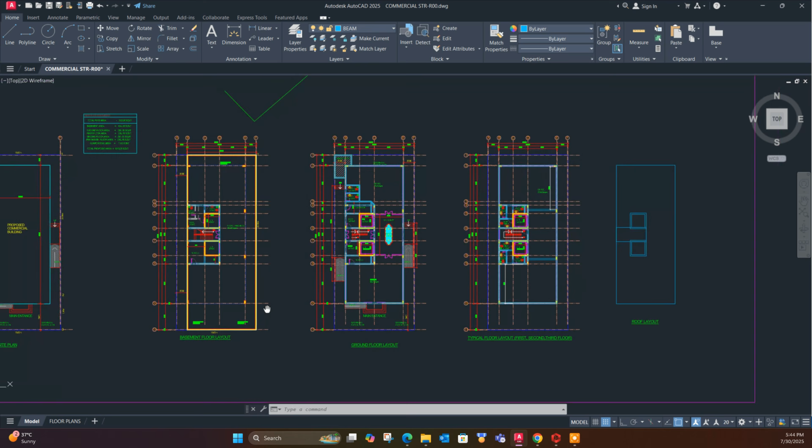Bismillahirrahmanirrahim. Dear viewers, in this tutorial, we will model a 5-storied commercial building having one basement. This is the plan of the commercial building and this is the elevation. From here, we will get floor heights.

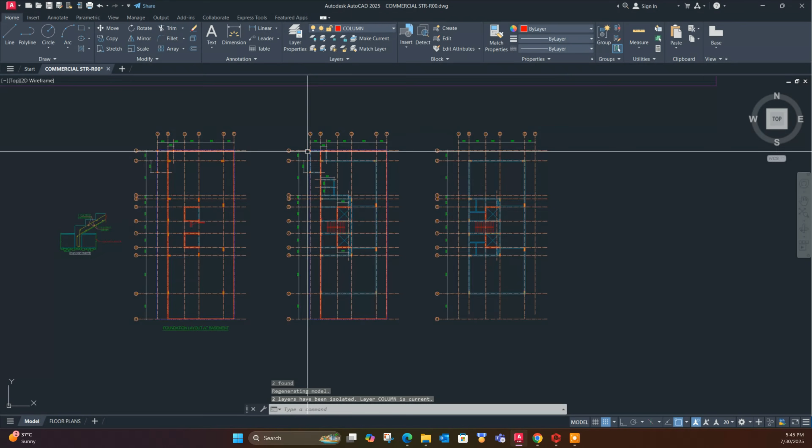First, we will isolate column and grid layers so that we can prepare the DXF file to import into ProtaStructure. Now separate the column and grid layers. From here copy these layers to a new CAD window, then paste here. From here we will make it a DXF file and we will save the DXF file so that we can import into ProtaStructure.

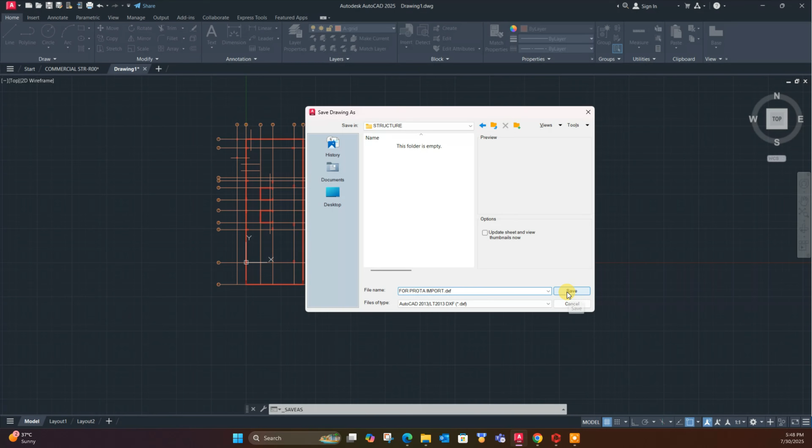Now close the drawing tab, open ProtaStructure program. From here create new project, type the project name, then select the template with relevant code which we want to use for this project. Click OK. Now go to DXF import option. From here load DXF file. Now select the layers. Using this, grids and columns will be automatically generated in ProtaStructure. Other things we will keep same as it is, then click OK.

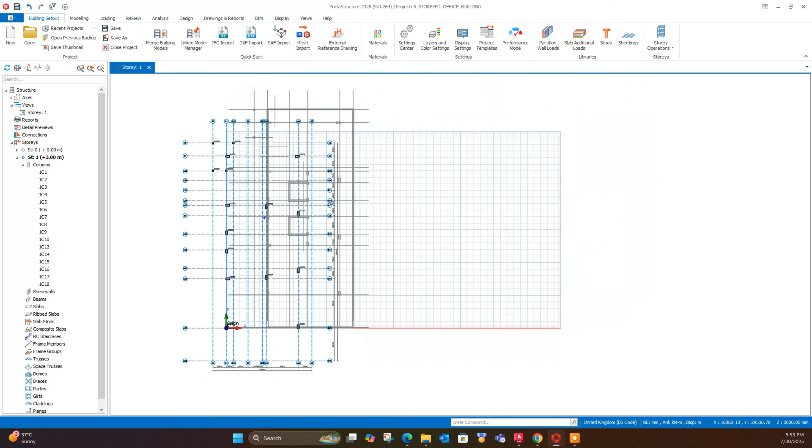Here the retaining wall section was drawn with column layer, so full rectangular section generated from retaining wall boundary. So we will delete it. We can use external reference drawing to model other elements in ProtaStructure. Here I am using same DXF file as external reference drawing. We can see the drawing is not located at exact origin of the main model. We can move the reference drawing easily like this. Now we can model lift core wall following the reference drawing.

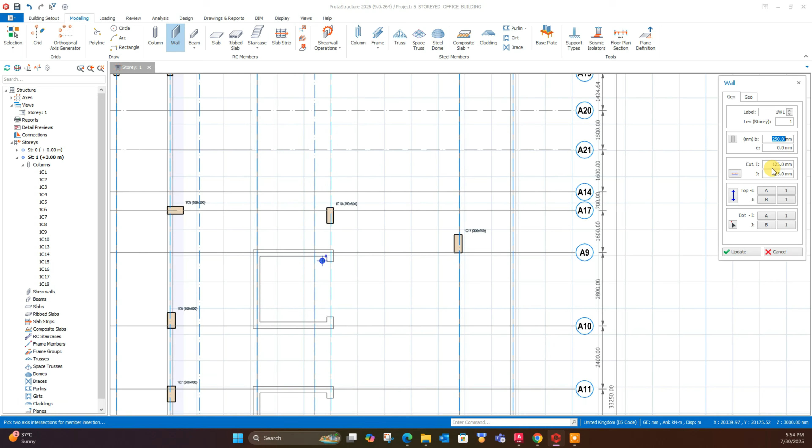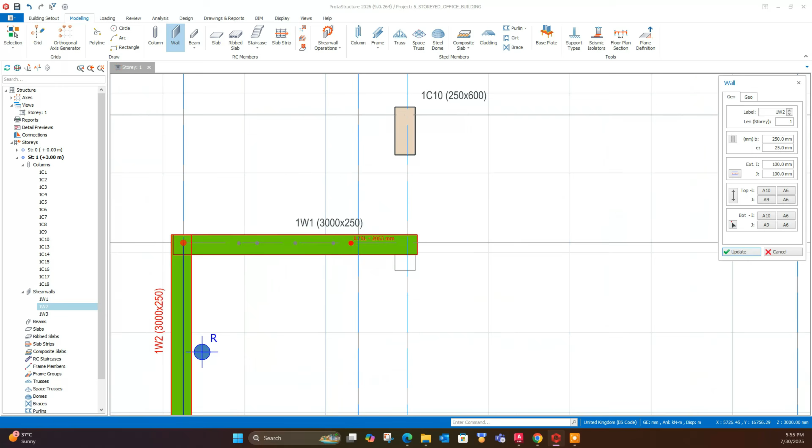Here we will provide the thickness of wall and offset over the center line or grid line. We have not provided any eccentricity or offset. We are modeling the wall keeping grid in center line. Now we will adjust the wall offset using up, down, left, right arrow of the keyboard to make the wall aligned with the reference drawing. And we can adjust the extension of wall from the connecting nodes like this.

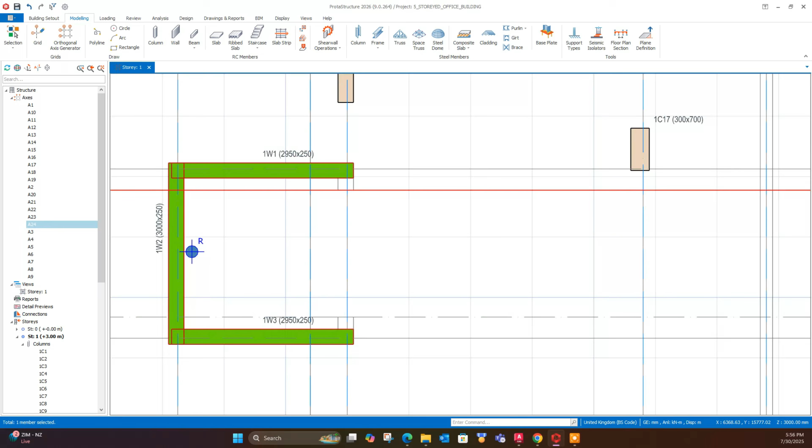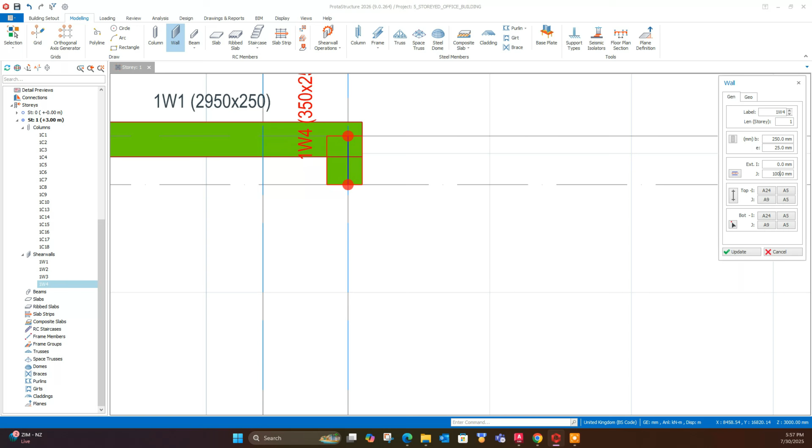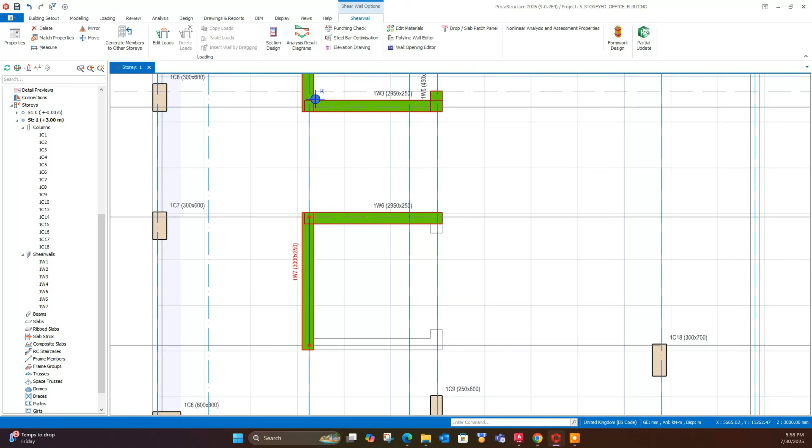Now create more grids to model the other portion as per reference drawing. Select the wall option, then customize start and end offset of wall. Not like this, so modify the offset like this. It will match with the reference plan. Similarly, down part like this. Then model other lift core in the same way. Here we can double click on existing walls to model new wall similar to that wall with similar offsets like this. Now model a small portion of walls same like before.

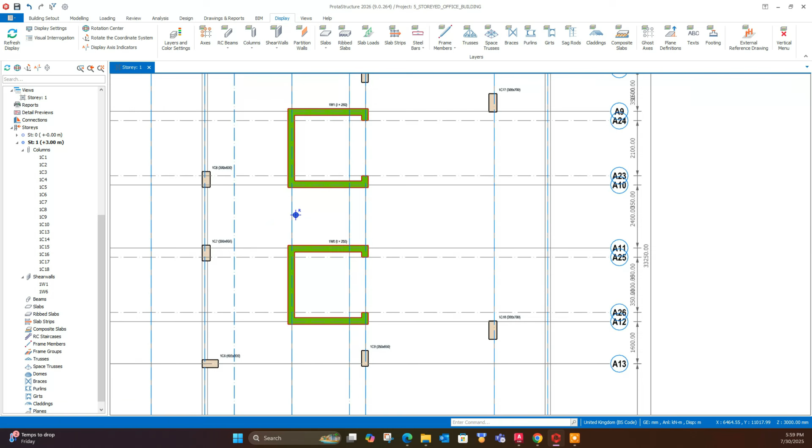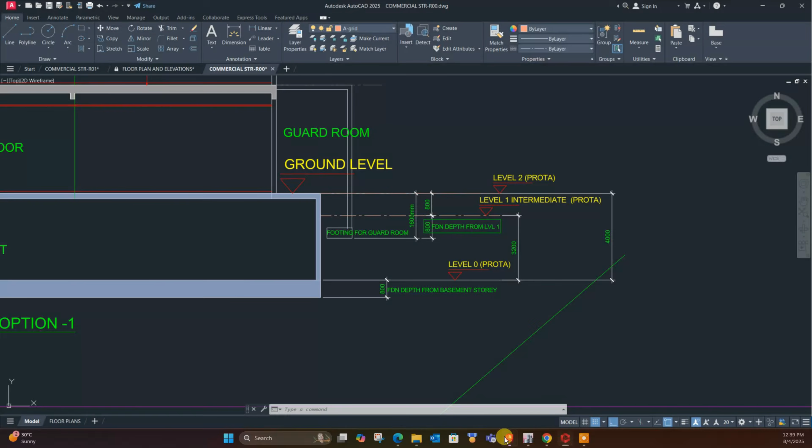Now we can merge the walls to create a single element in the structure. We can see our model in 3D view. Save the model. From View tab, we can create multiple windows side by side. We will create level for guard room as its foundation level is above the basement level. This is the guard room in plan. This is in structural layout.

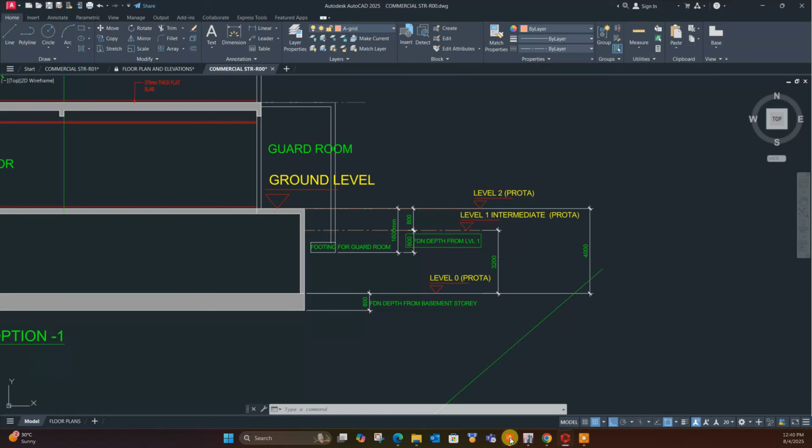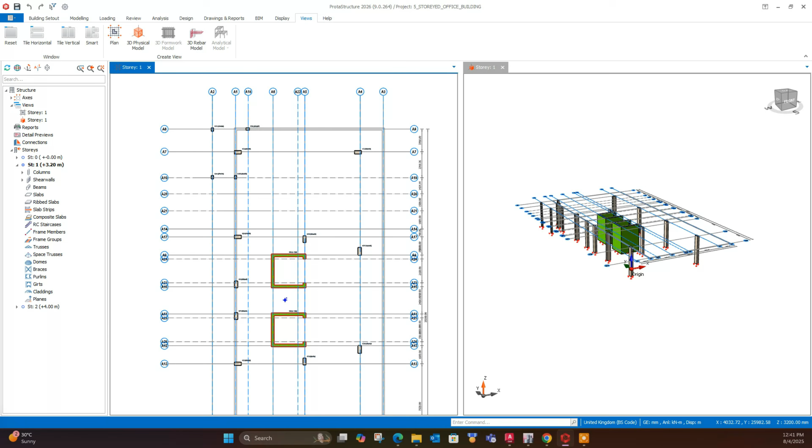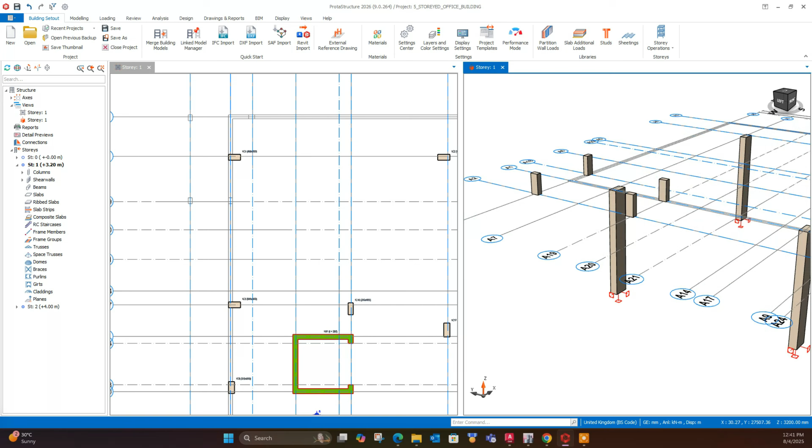Go to edit story. Here we will edit the story height. First one 3.2 meter. At that level, plinth beam for guard room will be there. Then we will insert another story 800 millimeter above this level. So these two combining the basement floor level 4 meter. We can select 3.2 meter level as intermediate level. Then select 4 columns of guard room and replicate or copy it to next level. Now delete guard room columns from basement level as per the elevation.

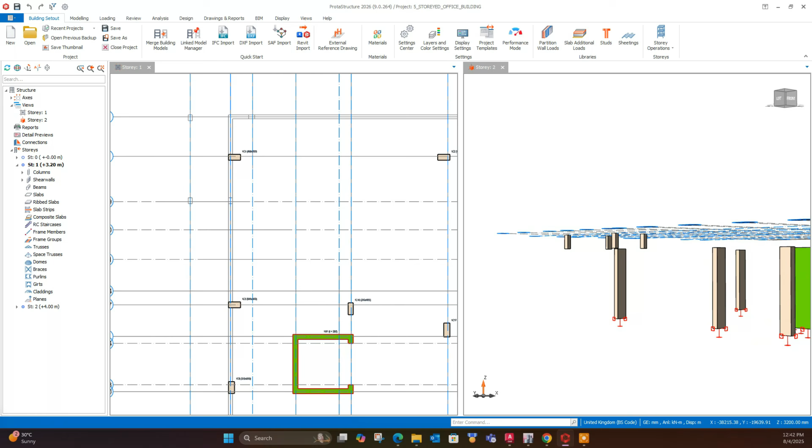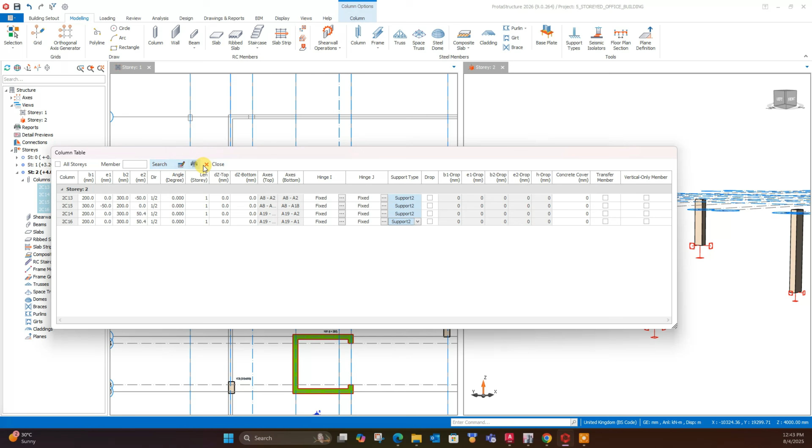Foundation depth for basement level 80 centimeter and the guard room foundation level also 80 centimeter down from the plinth beam. Now we will assign support for this guard room columns. We will define new support and then assign support to these 4 columns like this. Now close. In this way we can provide support in different level in ProtaStructure.

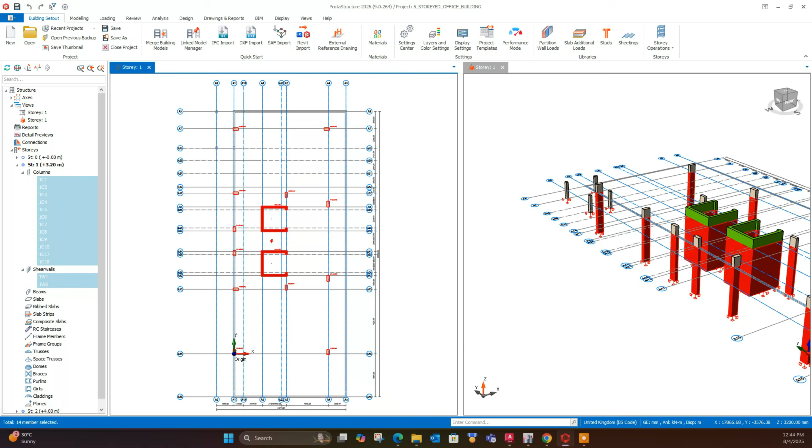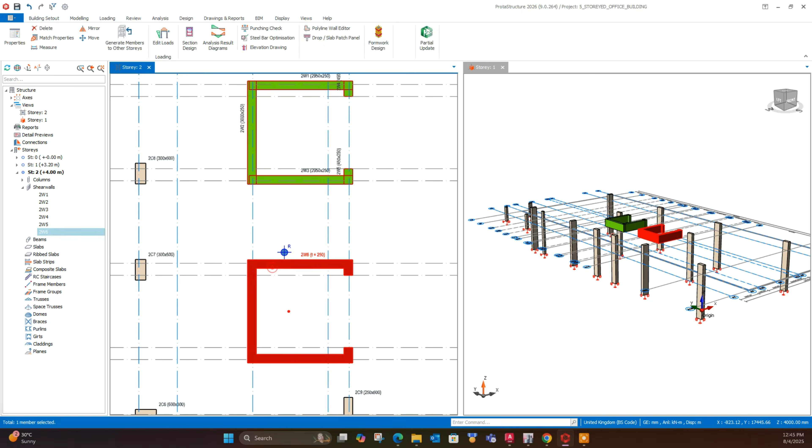Now select other columns to replicate to next story. Then we will delete the members from lower story. Then first we will select columns only, deselect the walls, then go to list. From here we will change the length story from 1 to 2. Similarly, select the walls and change the length from 1 to 2 so that these members can continue from basement roof to bottom of the basement.

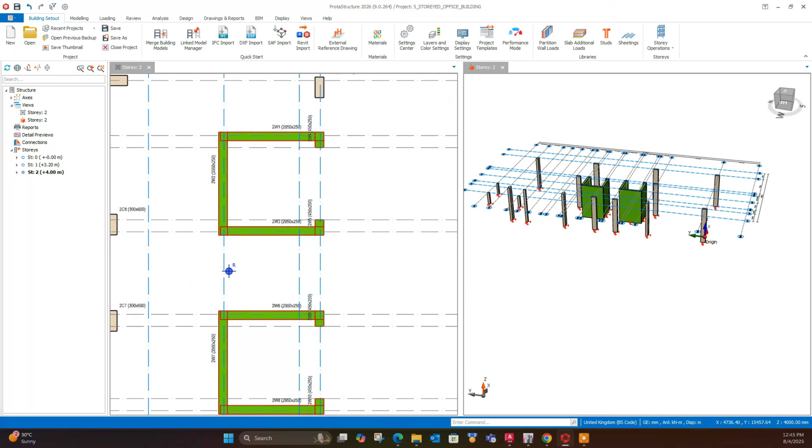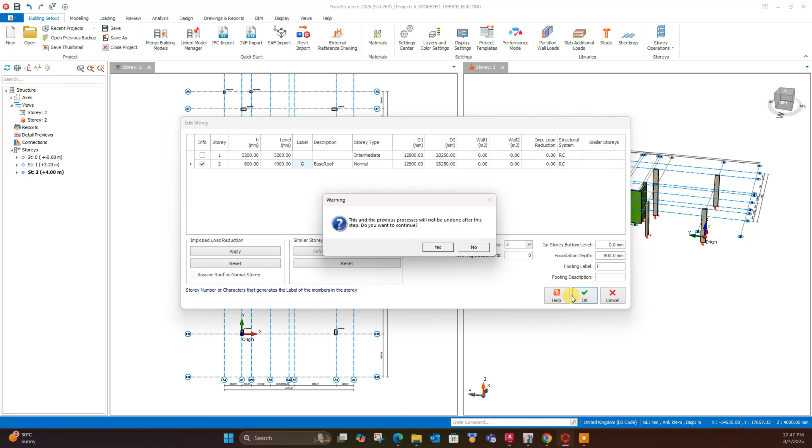From edit story, we can provide the description for basement roof level. We can provide level marking so that in detailing the beam, column and other members will be identified by those level marks. Click on OK. Save the model. Now we can model basement wall following the reference drawing. Provide the wall thickness and other parameters.

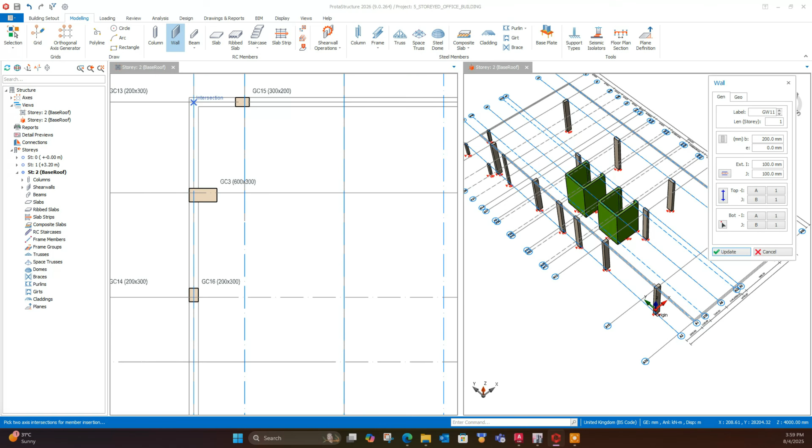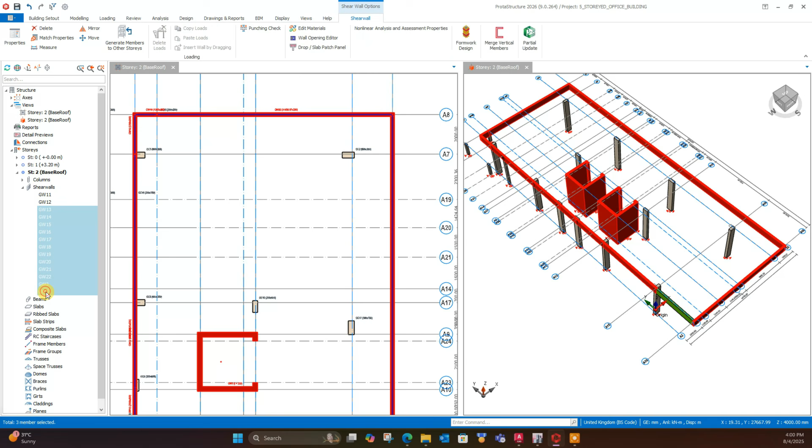Similarly, model this basement wall all around the plot line and then select the retaining walls to change their length from single story to double story like this. Now we will model beams at basement roof level.

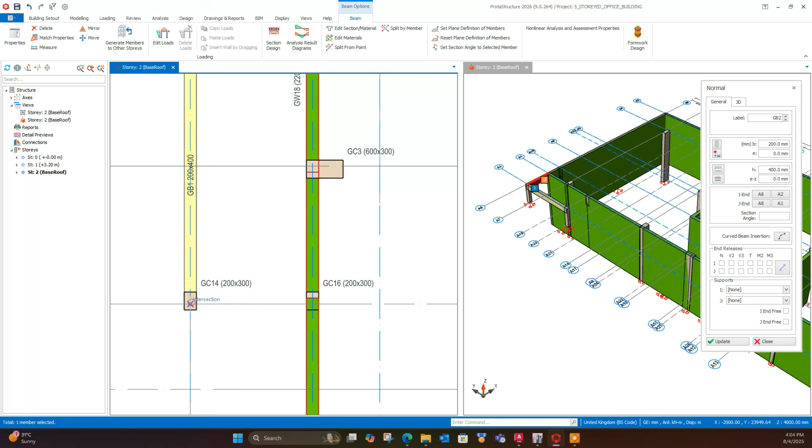I have increased the speed of the video because modeling of beam is easy and same like before we have seen in previous tutorials. If you are new to ProtaStructure, you can check my previous tutorials on different buildings. You will see there how to model beams, and from here also you can understand how we are providing parameters and modeling the beams.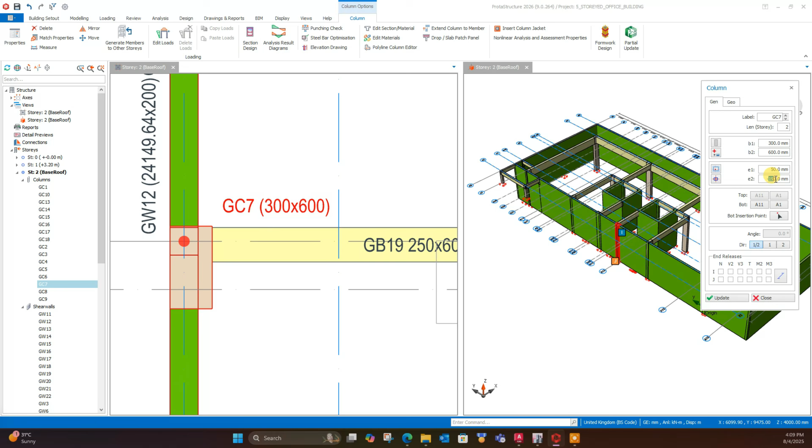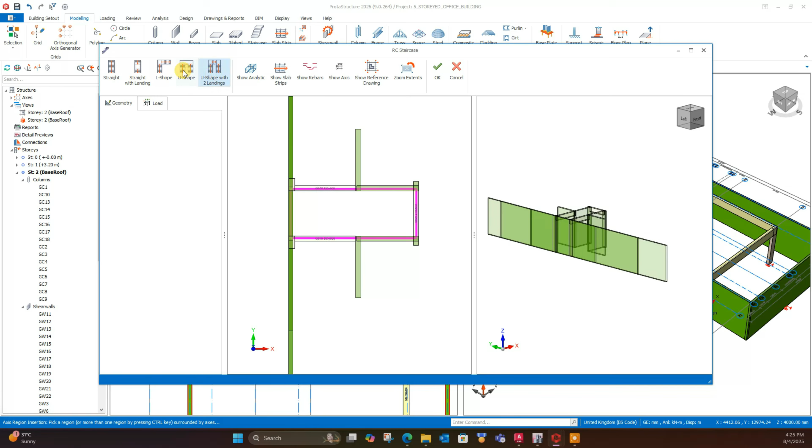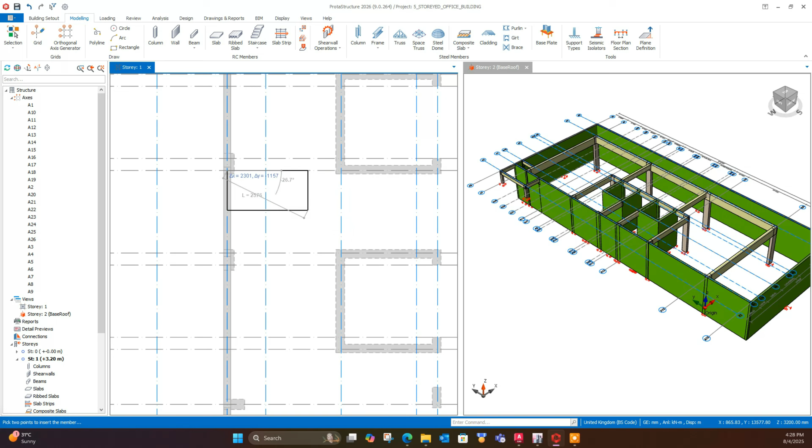Now we will model stair. Program will ask to define load cases before modeling stair or slab. We will define preliminary load cases, dead load and live load. Then we will start modeling of stair or first slab in model. Here in this level, stair is getting only 80 centimeter height. So we have to go to basement level to model the stair up to 3.2 meter height. Then we will change the floor height at stair model from 3.2 meter to 4 meter so that it can cover basement level to basement roof level.

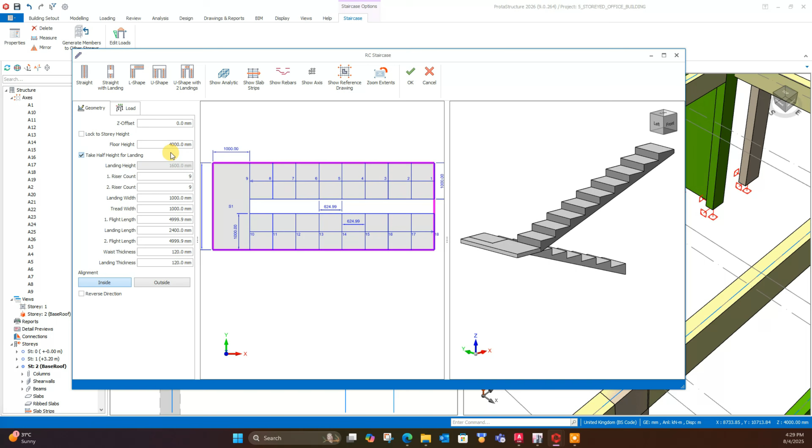Now here we can see the stair top level at 3.2 meter level. So now double click on this and then provide floor height 4 meter to adjust the stair top level at basement roof. Now it is okay. Here we can edit step number, waist slab thickness, landing width and other things as per architectural drawing. Then we can provide the loading values from the load tab. Click on OK.

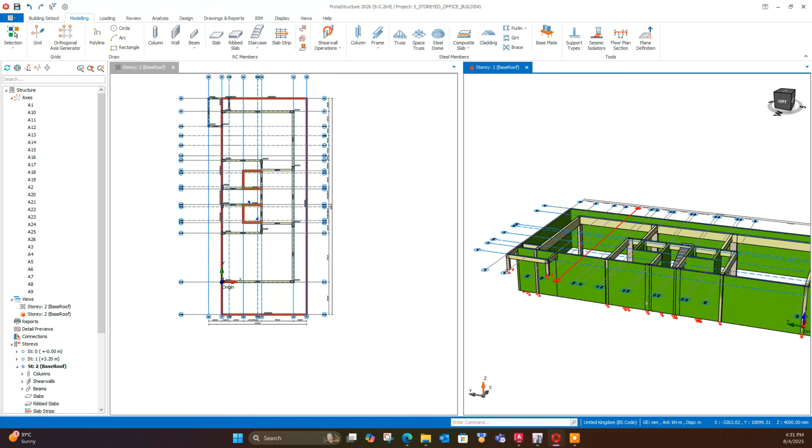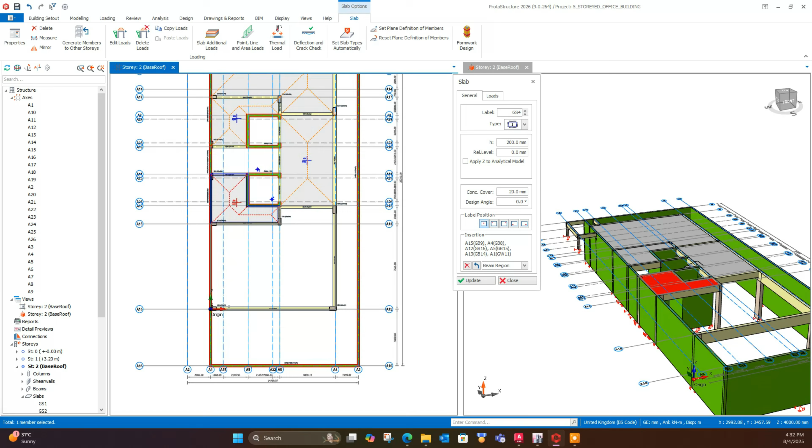Now go to basement roof level. Here we will model slab, basement roof slab, provide slab thickness, then loading values. From the list of occupancy category, we can give the input for live load. Use beam region to model the slab. In this way, we will model all the slab for basement roof level.

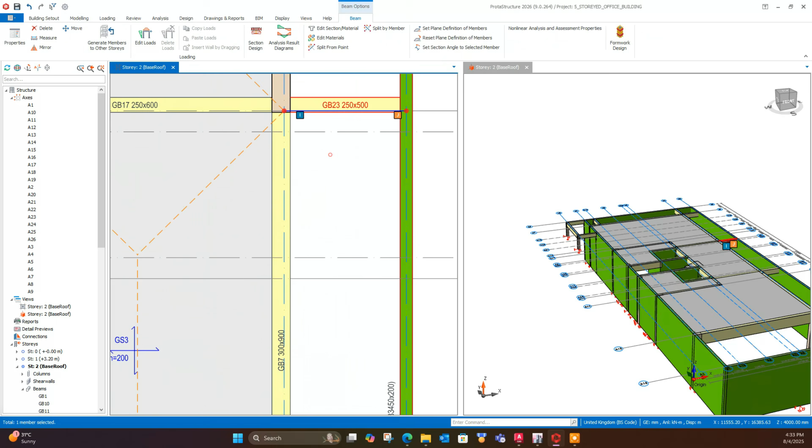Modeling a few extra beams to cover the basement roof level outside the main building area. It will reduce the slab span length.

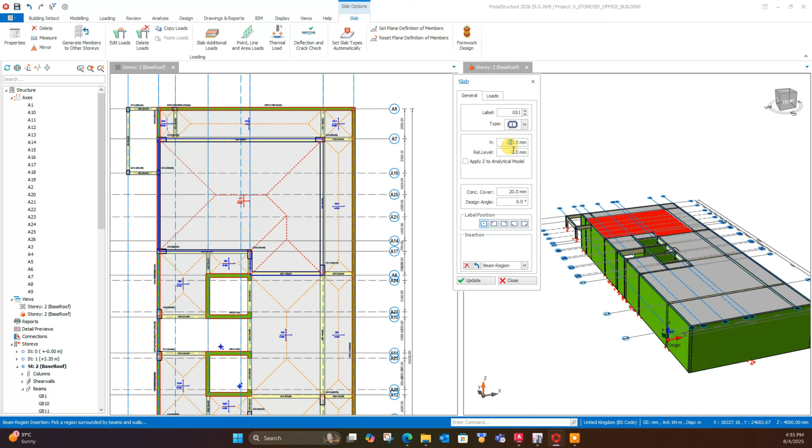Here, this slab area we can separate using an additional beam. Now model the separated slab in those areas. We can increase the slab thickness for large slab areas. For other small slab areas, we can decrease the slab thickness.

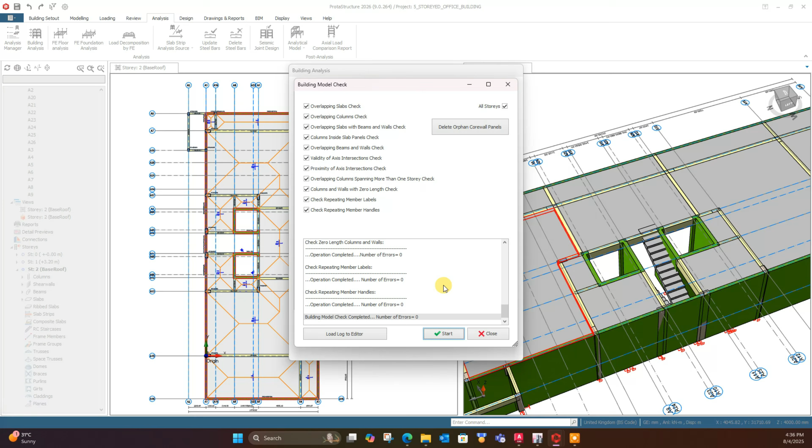Now save the model. Then run building model check to confirm that there is no warning in the model. We can view our model in single line view or analytical view like this.

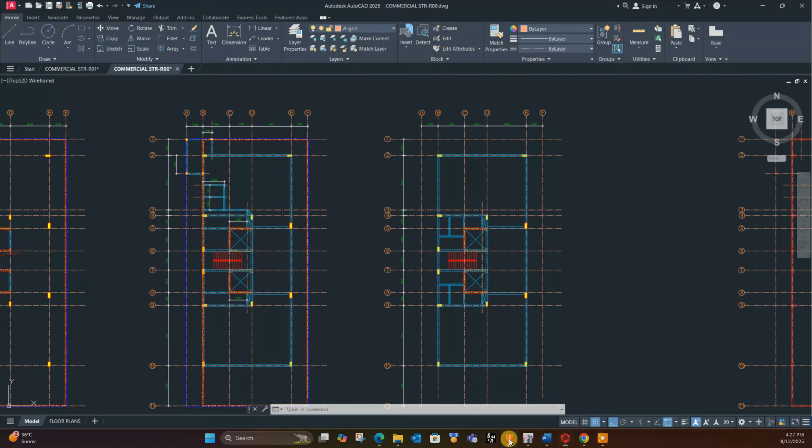Now we will add stories using the option in insert story. Here we have already inserted two stories or two levels. Now how many levels need to be added? We can see here 5. So 2 plus 5, total 7. Here we have to provide the total number of stories to get an extra 5 levels.

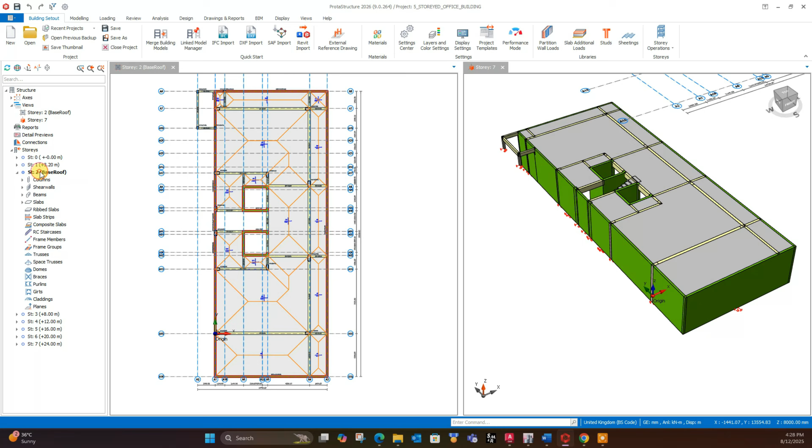Height providing 4 meters for typical floors. Ground floor height is 5 meters. So we will edit the ground floor height. Here type 5 meters, 5000, and other floors 4 meters typical floor, and the top floor, that means stair head, that is 3 meters. We can provide the description for different levels: ground floor roof, first floor roof, second floor roof, like this.

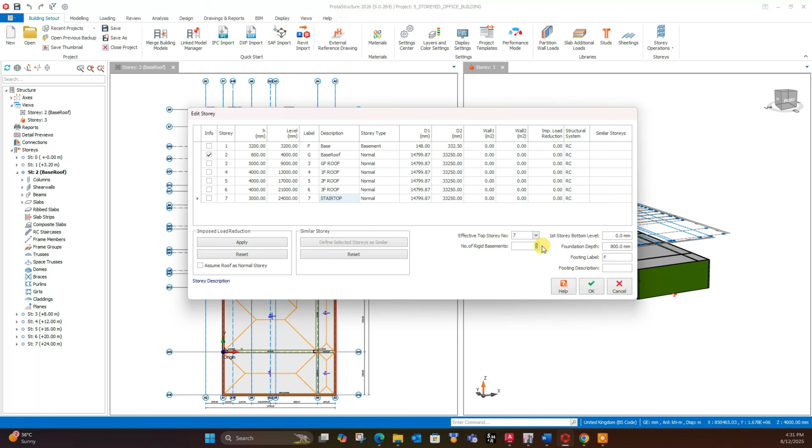Now we can provide the number of rigid basements. The basement floor we have divided into two parts. So for the basement floor we will provide number of rigid basements 2. Now check the plan is in story 2. Then go to generate story. From story 2 to next story, click on OK.

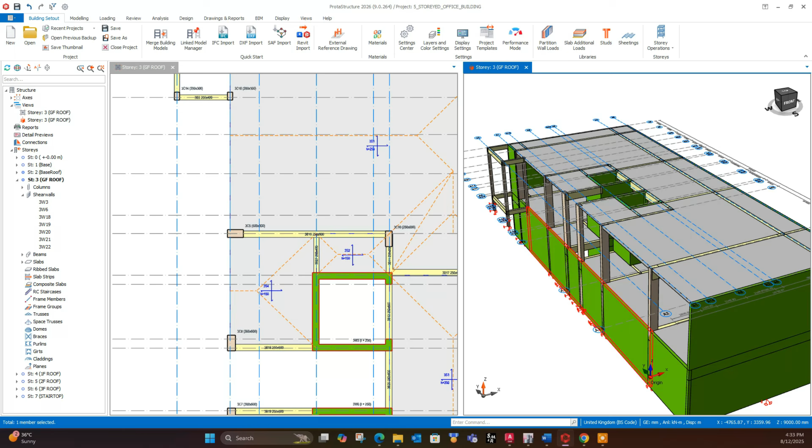Now delete the retaining walls from this new story. Here we can see the column and wall members having double height because we have assigned member length 2 for continuing 2 floors. Now for these newly generated members we have to change the length from 2 to 1.

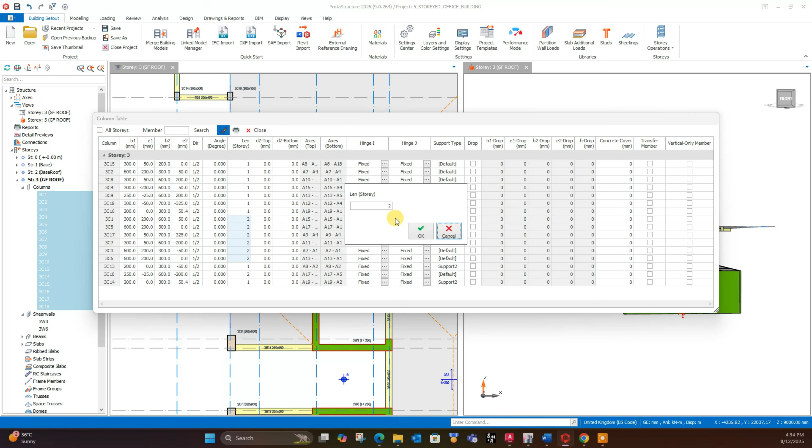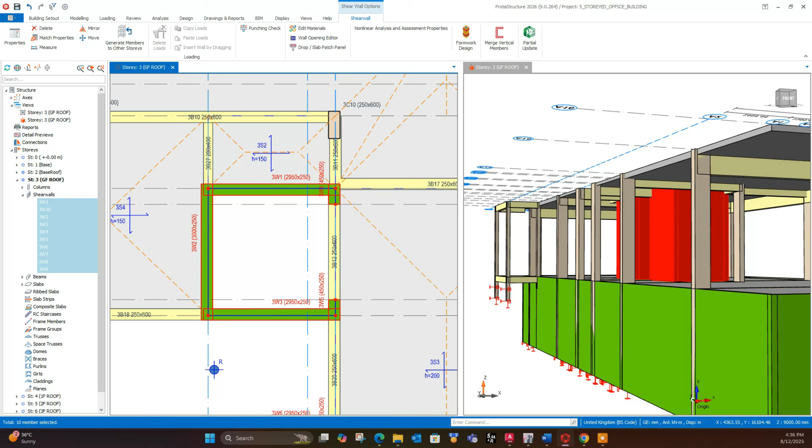Now we need to explode the lift core so that we can edit length from 2 to 1. Then select the walls, then go to property table, length from 2 to 1. Now again merge the walls to make it a single lift core.

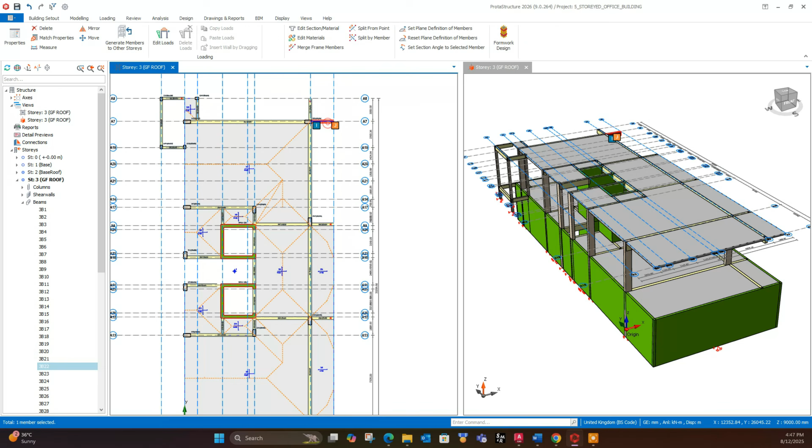Now go to building check to check the model if there is any error or warning. There is no error or warning, so now we can go for the next steps. Now we will delete the extra portion of slab and extra beams according to our ground floor roof level, and we will prepare the guard room roof level and basement roof level according to our drawing.

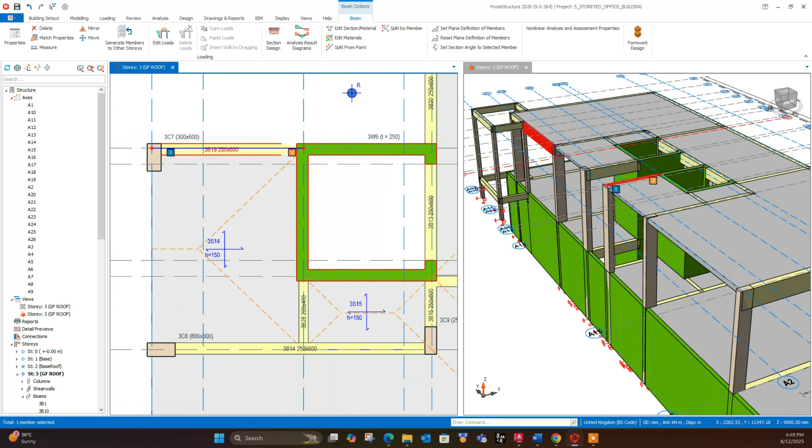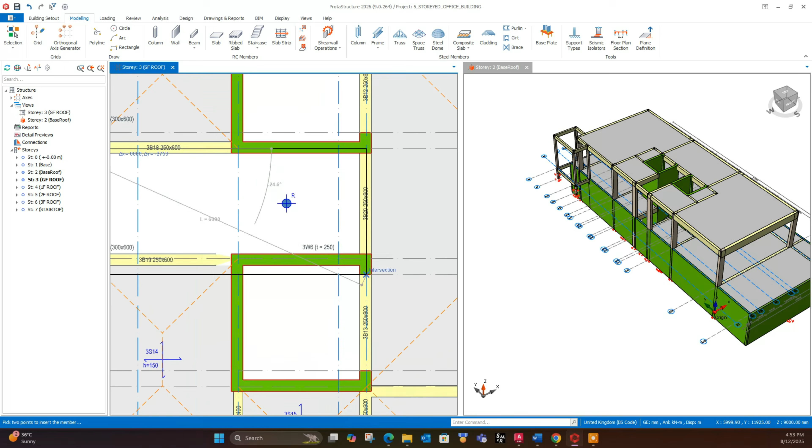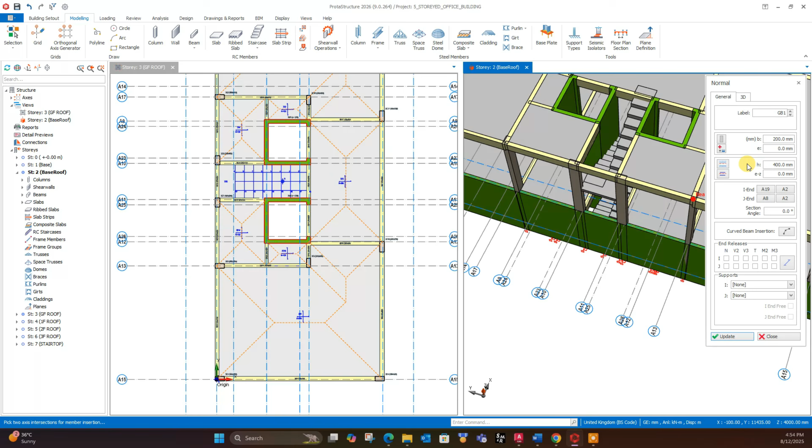Now we will model the stair for ground floor level, same as before. Modify the parameters for steps, slab thickness and loading, then click OK. Then model the landing beam for the stair landing. Model the slab for the guard room roof, like this.

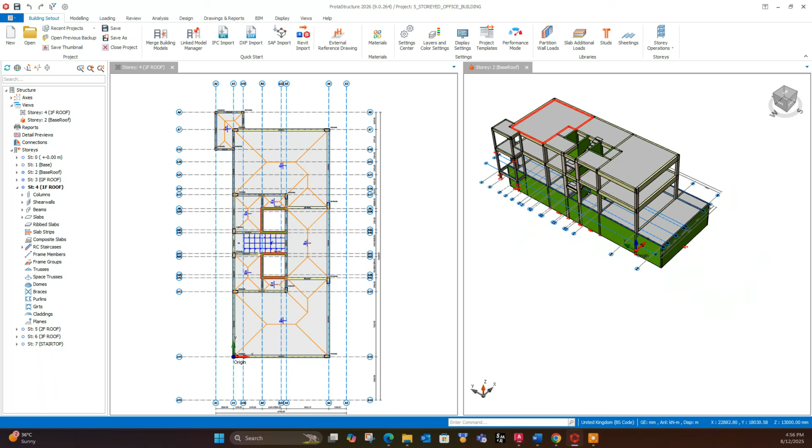Now replicate or copy stories from this floor to the next floor, like this, and delete the guard room part for this floor, and also delete the split beams from this floor. Now model a new beam here, then go for building check to confirm that there is no warning or error.

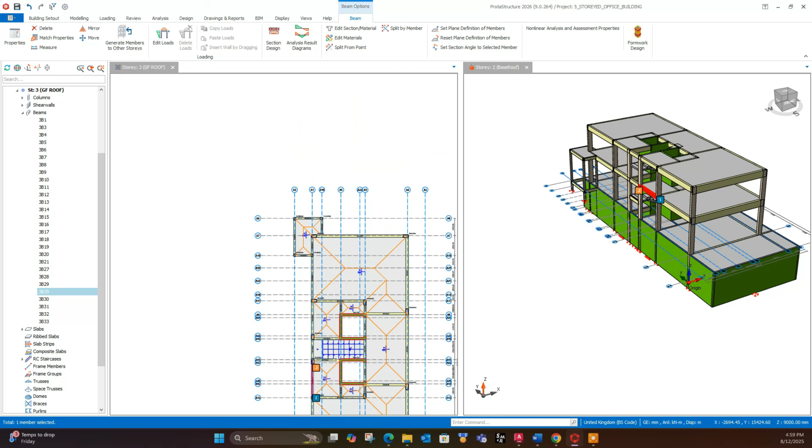Here somehow a repeating ID error is found, so we will check the level of beams and we can modify the level to remove the error. Edit the beam level, then apply. Now go for building check. Now we will see the error is removed. Add the landing beam for this floor also.

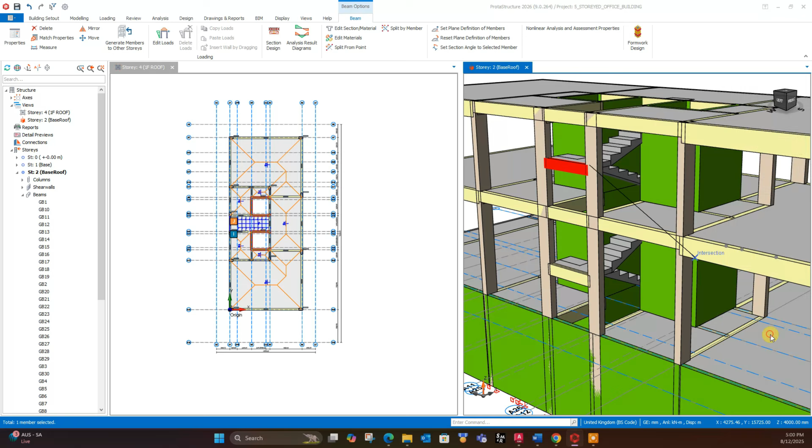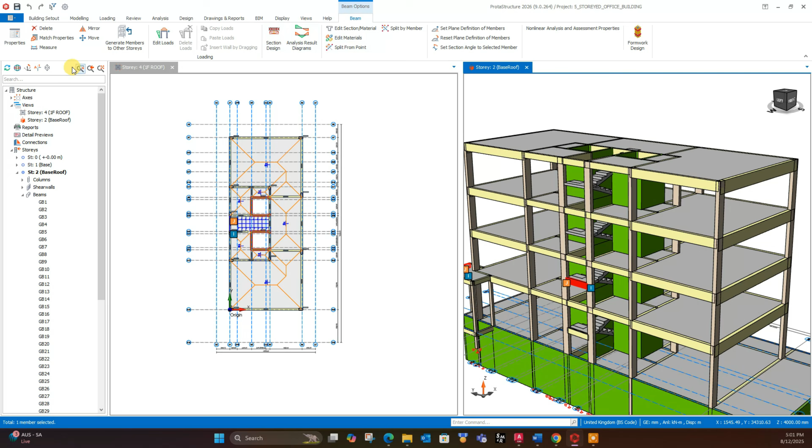Now we can make typical stories similar from the edit story option. Select the stories and define stories as similar. Click on OK. Automatically the members of the typical floor are generated to other similar floors. Only landing beams we have to model manually because landing beams are not replicating or copying to other floors.

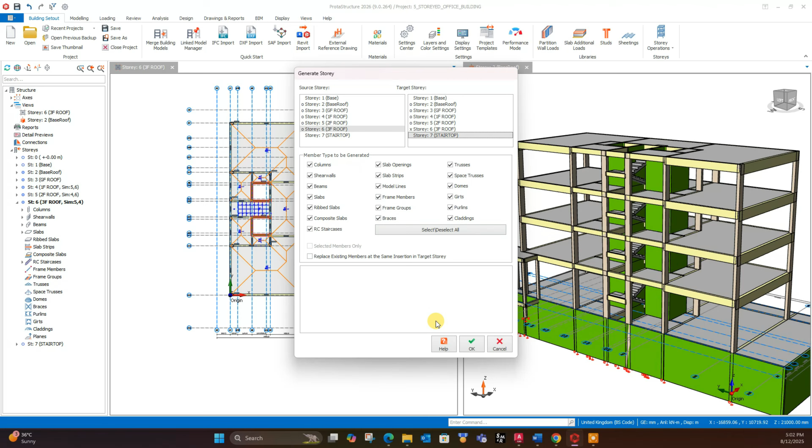Now replicate the story to the last story level, that means stair top level. Here we will delete unnecessary beams and slab according to the stair head plan, and we will prepare the stair top floor level with new beams and slabs.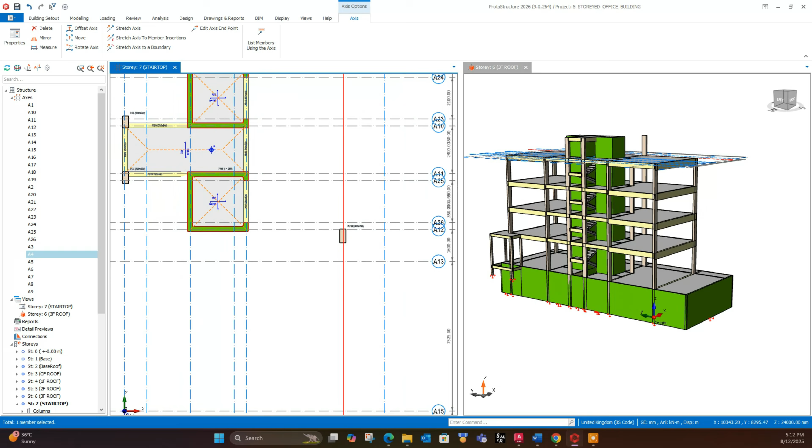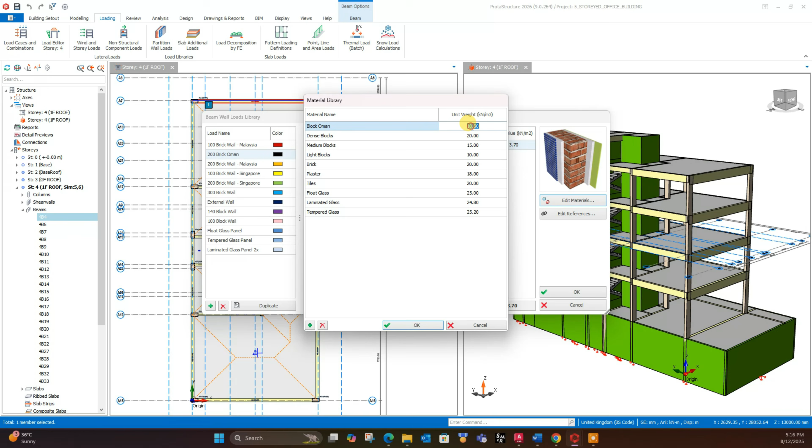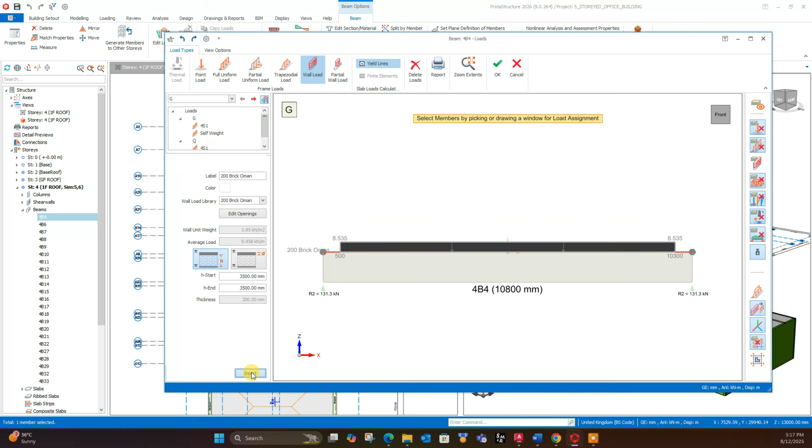Now select the beam, go to load editor. From here we will apply the wall load. Here we will provide the wall height, then click on insert. Now click on OK. Being similar floors, the wall load came to these three similar floors.

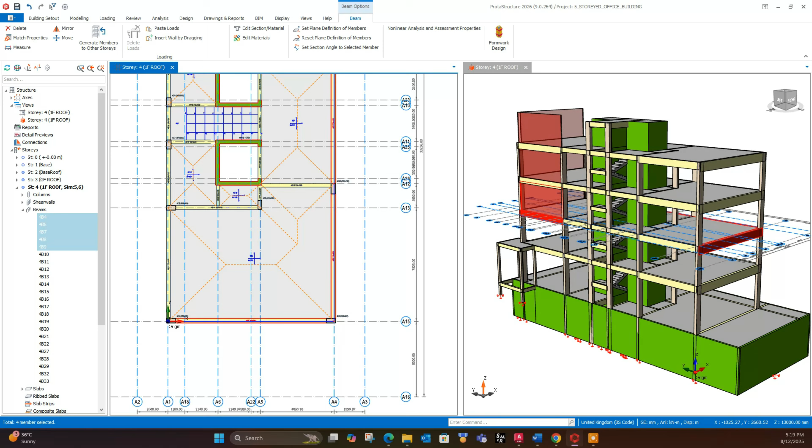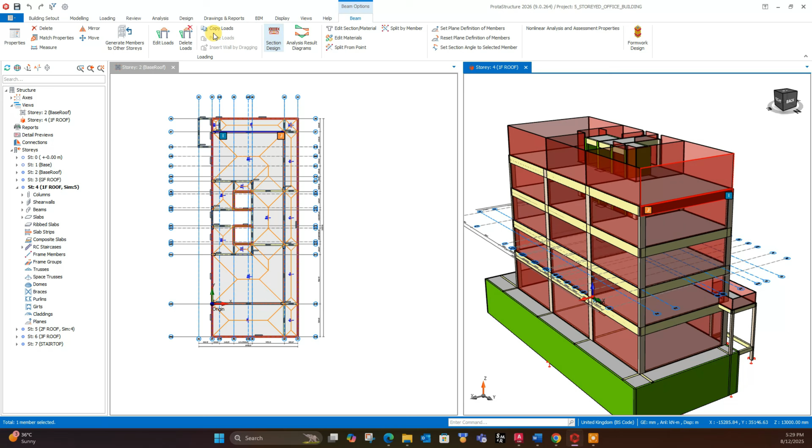Now right click on the beam and then select copy load. From filter select wall load, then select the new beam and paste the loads. In this way we will finish applying wall load on all the floor levels. Now we can make one floor not similar to edit the roof wall loading differently. Now in the roof level we will edit the wall loading on the beam like this.

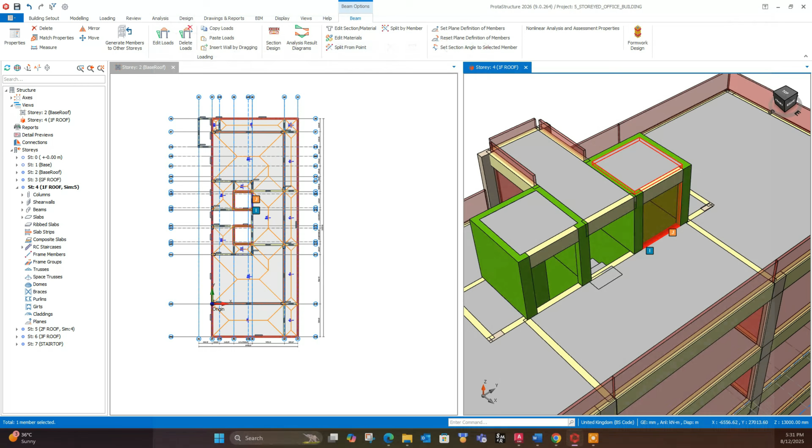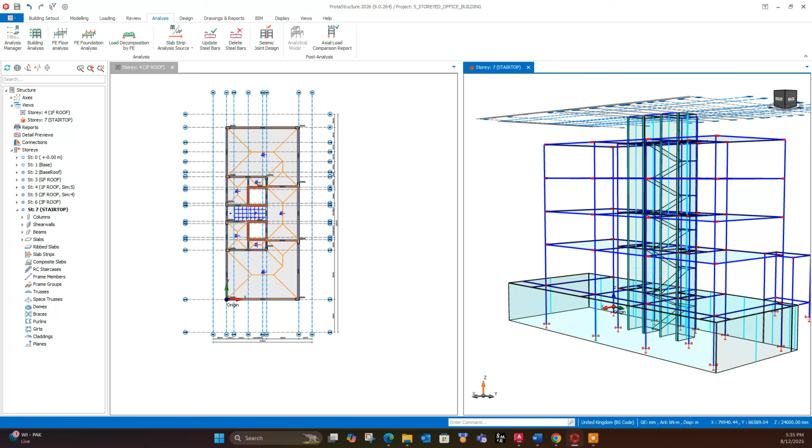So wall loading is finished. Now we will go for building model check. There is no error in the model, so our modeling of the building has been completed. For the analysis and design part, we can follow the previous tutorial which has been uploaded in my channel. You can follow that one.